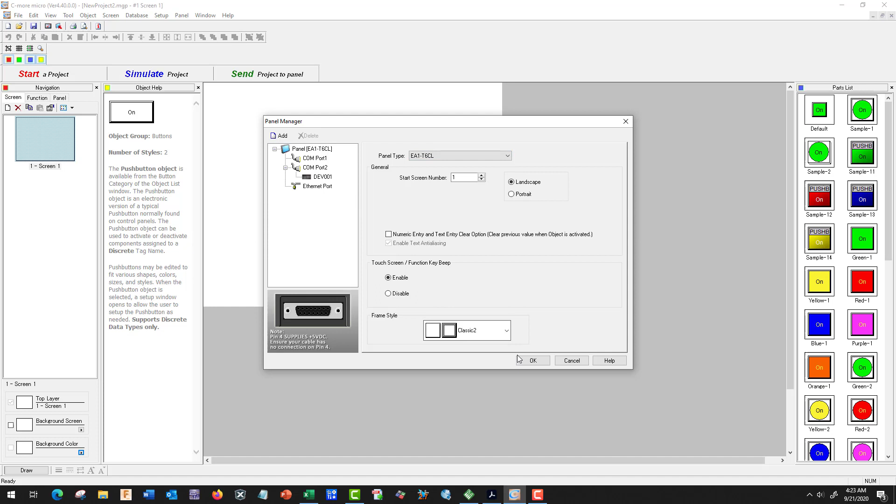Let's go to Panel Manager. We got that, and let's go there and direct connection. So we have a baud rate of 38400. That's our standard, so this is correct.

Let's try send it to the panel. It's not going to allow it to. Let's save it, and let's see if we could find the proper port. So go to transfer, and it's going to give us this message. That is a good message, that means we have the right port.

Let's go ahead and OK it and upload our newest firmware.

Okay, we need to power cycle our software, and let's do that. One note is when we power cycle, the AC and the USB connection to the screen on the bottom connector needs to be unplugged, because the USB will power that screen and it won't fully reset.

Okay, so let's go to View and let's zoom in. I'm going to make it 400%. That seems to fit my screen. Good, so we have the whole thing now.

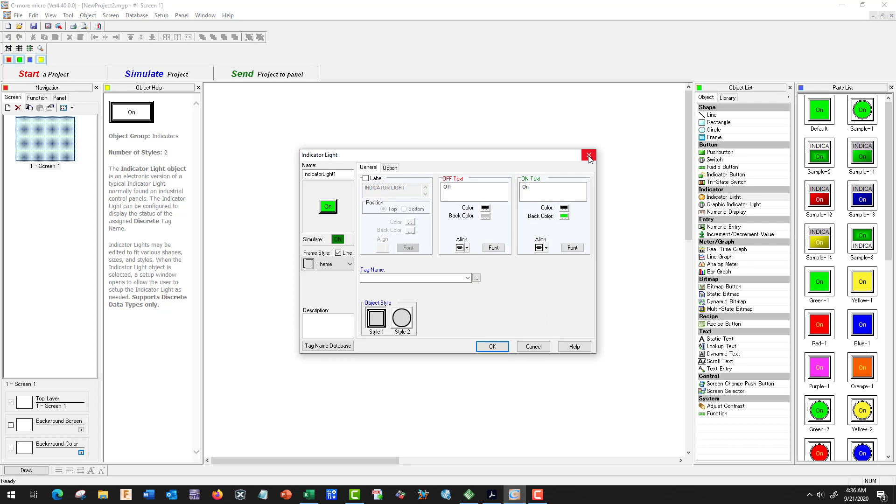Alright, so the first thing we're going to do is get an indicator light. And if I double click on it, it's going to give me, just go ahead and grab sample 1.

And indicator light, good. So we're going to go down to tag name, motor 1. And let's click label and let's go motor 1.

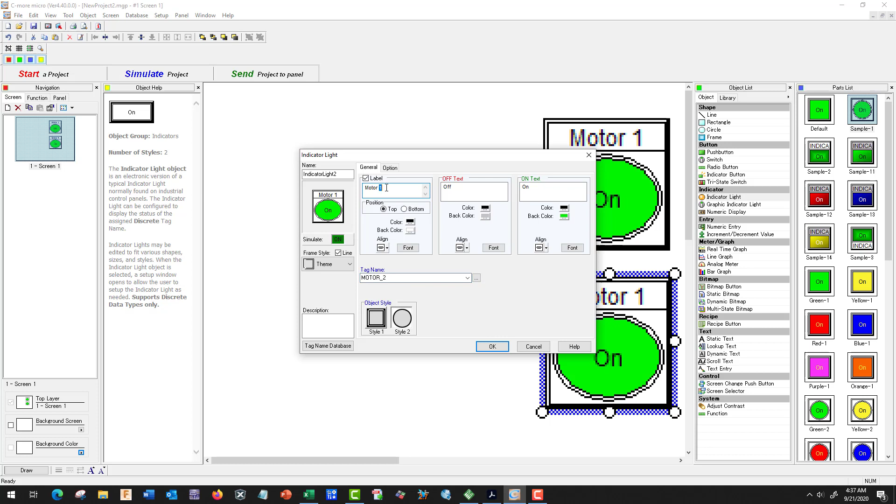Okay, good. It's going to look a little grainy because I've magnified it by 400%. So we can go back and grab it again. Let's go ahead and copy and paste because they're the same looking deal. So let's double click that and we're going to go to our drop down menu, go to motor 2. Tag name is what our PLC is going to look for. And let's change the title to motor 2, green's good.

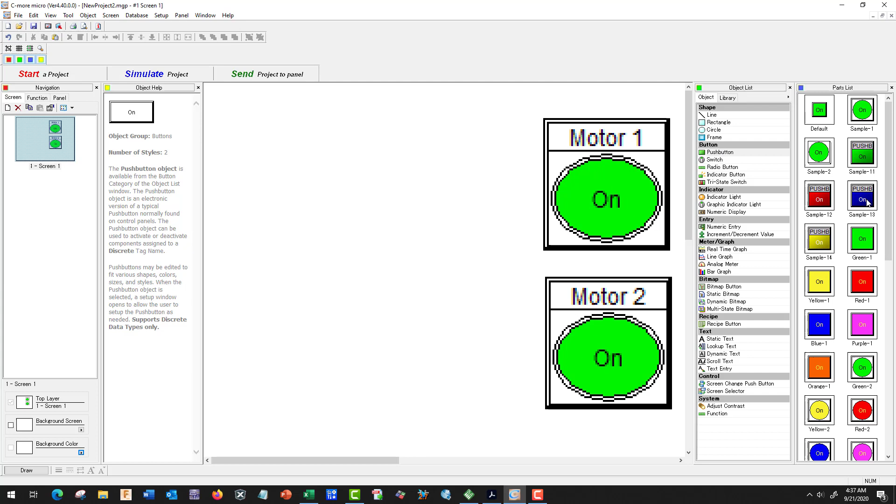So that was the indicator. Now let's get some push buttons in here. We're going to use some virtual push buttons. Let's go to push button and let's see here, let's do blue for on

and red for off. So let's go ahead, we're going to call this motor 2 start because I don't have a motor 1 start, so I'm going to show you how to do that. And we could enter and put a second line of code in.

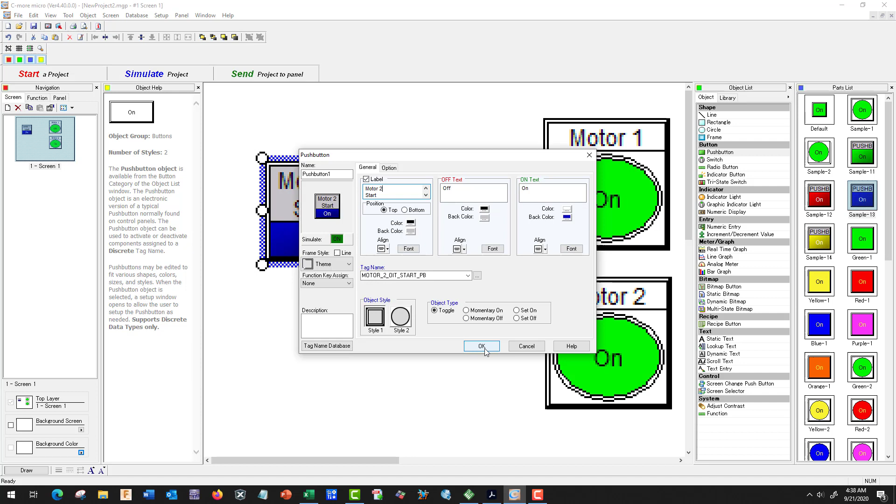And oops, that's a stop PB. That's bad. So let's go to motor 2 start PB. Okay. And let's go back, and that should be motor 2 start. Sorry. All right, so let's move this down here.

And let's copy and paste. And let's double click again, go back into here, and we're going to open up our list. And first off, I made a mistake here. It should be momentary on, but that's all right. We'll go back and fix the other one here in a second.

And we're missing everything, so let's go to add, and we're going to go to motor. Okay, we're going to need an underscore motor 1 start. Good.

And now we need to go to the memory type, so we're going to go to DLX. And let's see here, so we got motor 1, 2, 3. We're going to go DLX 4. So we just need to put 4.

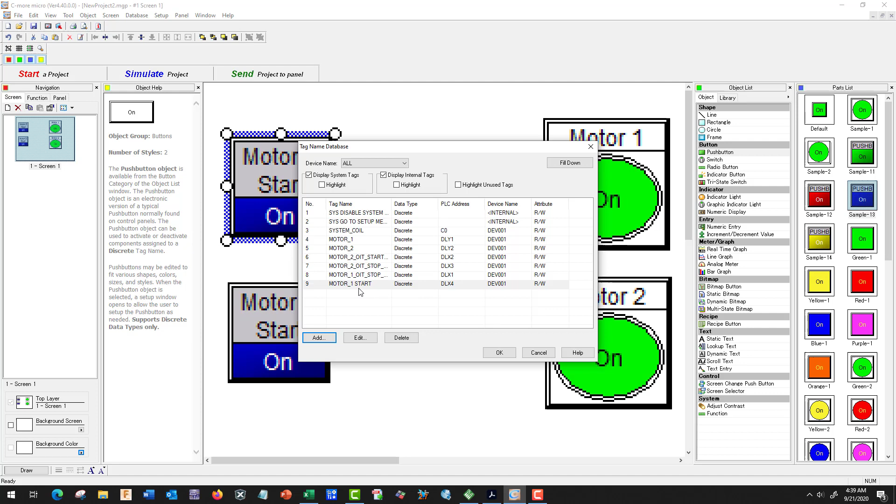Motor 1 start. Good. Okay, momentary, motor 1 start, motor. Let's call him motor 1 start, momentary. Okay, so let's go back and fix this guy. He should be a momentary. Toggle means that it's on and off when you push it. Momentary means it's on just for while you touch the button.

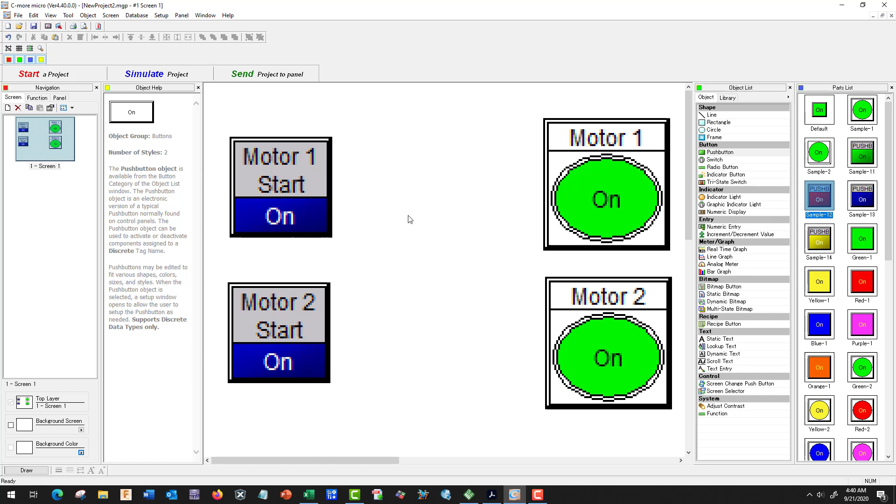Okay, so let's get a red one. And we're going to have him as motor 1 stop. Enter. Make that capital because that's important. Momentary. Good.

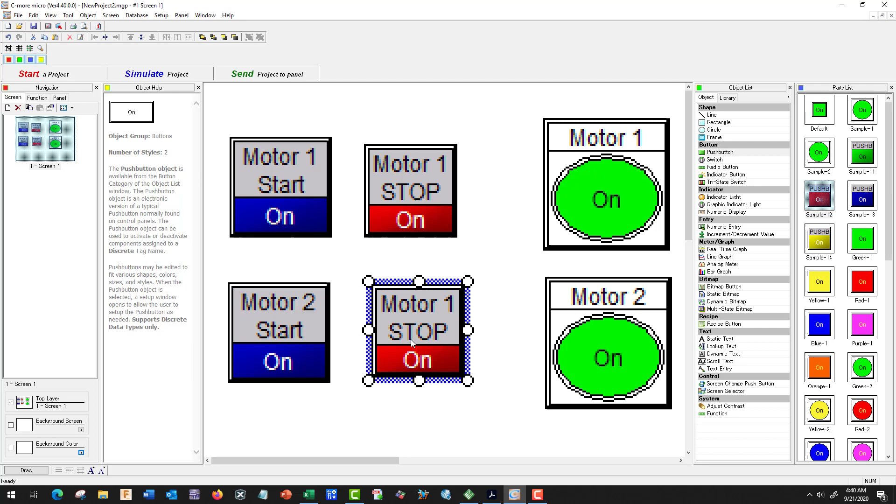Copy, paste. Motor 2 stop. Let's go into our database and pick number 2 stop PB. Okay, there's a couple things on the list, system and system call and things like that, we're not going to worry about. Momentary. Okay, so we're done.

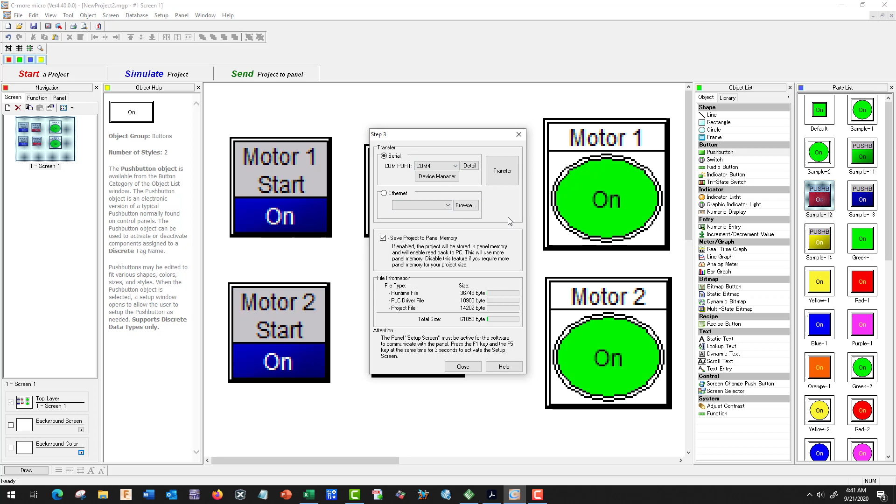So let's save it. And let's see if we could send it to the panel. So let's send project to the panel. And it should be COM4, even though I just plugged in my camera and stuff. Let's see if that's going to work. And it is. And good, that's transferred to the screen. Okay, it's going to go through our USB.

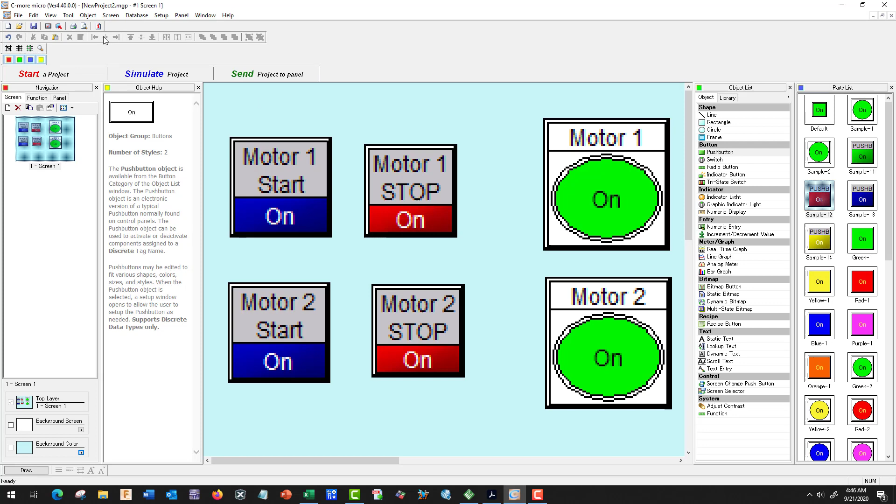Good, good. Okay, so let's add a couple simple things to this. Let's go to background color. That's pretty dull, that's a pretty one there. Okay, yeah, so you could pick a background color screen, and let's go to object, and we're going to go to text, static text, text. Alright, so what's our font?

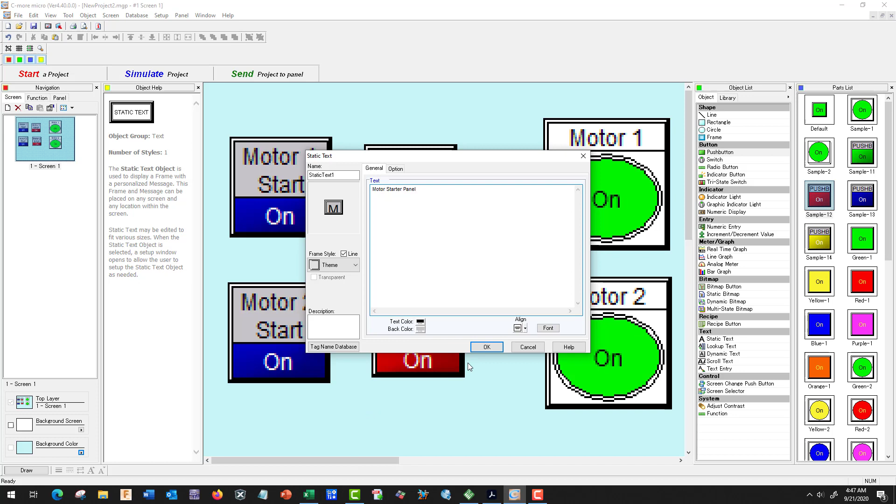Let's check. No, it needs to be, let's do 20. Okay. And let's do motor starter panel. Oh well, that's a good one. Alrighty, so let's do OK. Oh my gosh.

That might be a little bit too much. So let's go to a real size. So let's go ahead and close all that so we know where we can balance out this screen. All right.

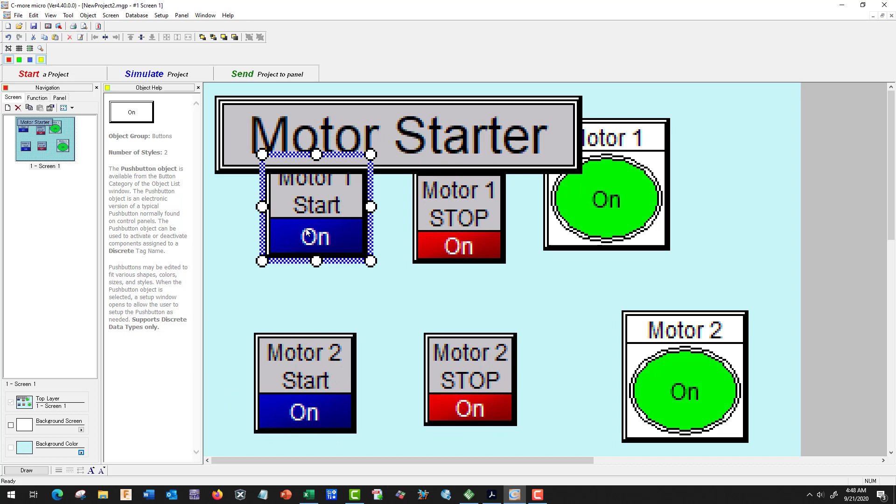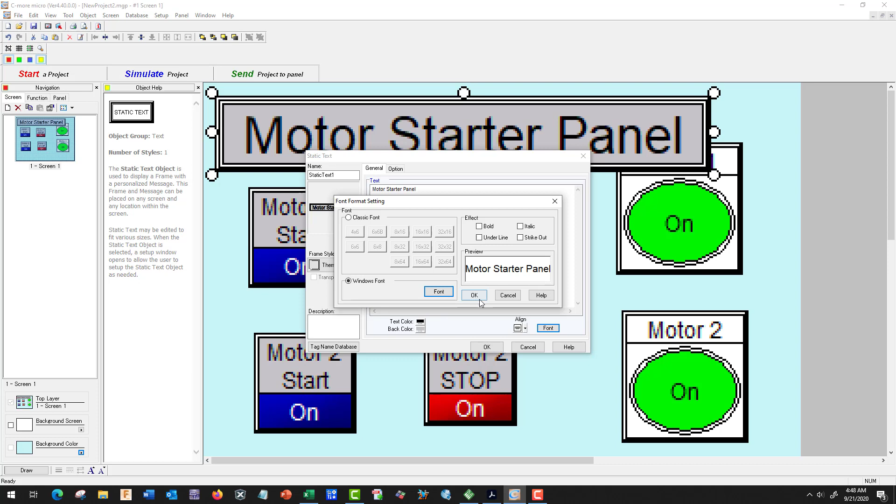It's way too big, so let's double click on him and let's go back to font, Windows font, and let's make it 16. We only have a 6-inch screen, so that should be good. That didn't change, did it? So I think we need to highlight it, then go to font. Nope. That's just big. Anyway, it's beautiful, we'll just leave it.

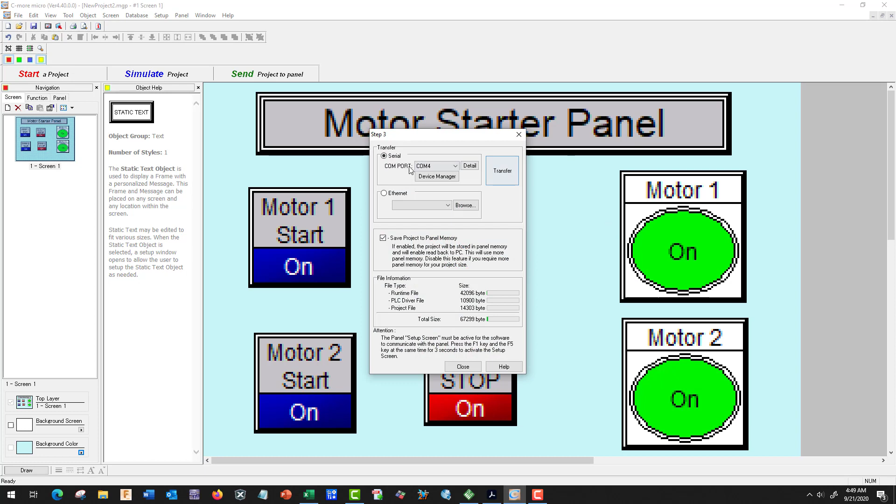Okay, again, let's transfer it to our panel. Good. COM4, transfer, and green, that's good. And that's it. Thank you.